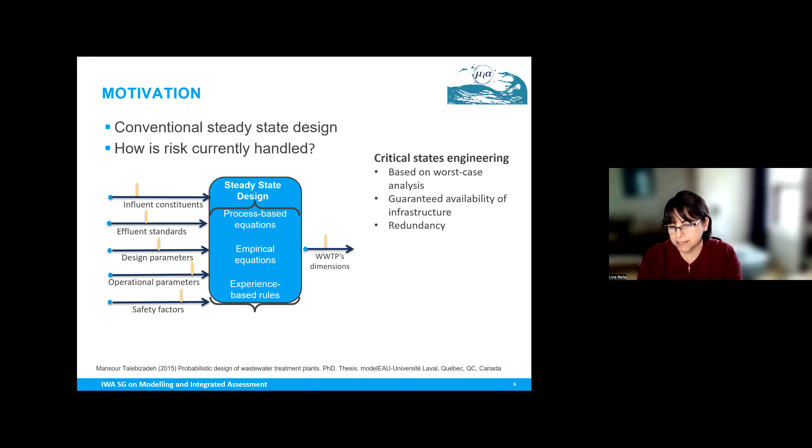In general, we find that we end up with 2 engineering approaches. One would be critical states engineering, essentially based on worst case analysis - for example, blowers designed on a maximum hourly airflow demand, potentially combined with a safety factor. The second engineering approach can be described as best effort engineering, based on analysis of average conditions - for example, the size of an aeration tank sized on a daily average load.

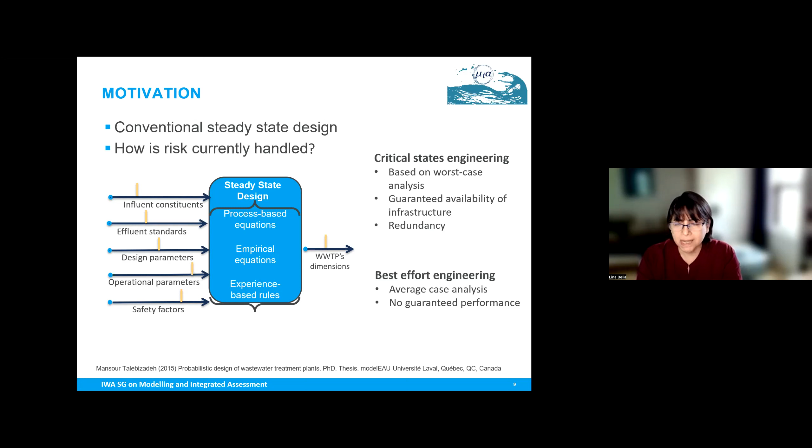Now, there are several drawbacks associated with this established procedure. It mainly implies that we work in a well-defined and stationary environment, so it kind of ignores plant dynamics. If you notice in the slide, a single input gives you a single output. It may also result in inflexible or inefficient designs, because it lumps risk into very few parameters, and assumes a combination of worst case conditions that may never happen. It also does not provide us, in a quantifiable way, the likelihood that a design will actually meet an effluent permit, and it does not address newly developed processes.

So over the last decades, we are transitioning to using process modeling and data-driven methods in our design.

And in operations also, I think we use more and more models for optimization, design of control. However, when we incorporate these models in our design procedures, which can actually overcome some of the downsides I mentioned earlier, in contrast to design guidelines, where uncertainty is accounted through the use of safety factors, in our models, we don't actually incorporate a formal risk evaluation procedure.

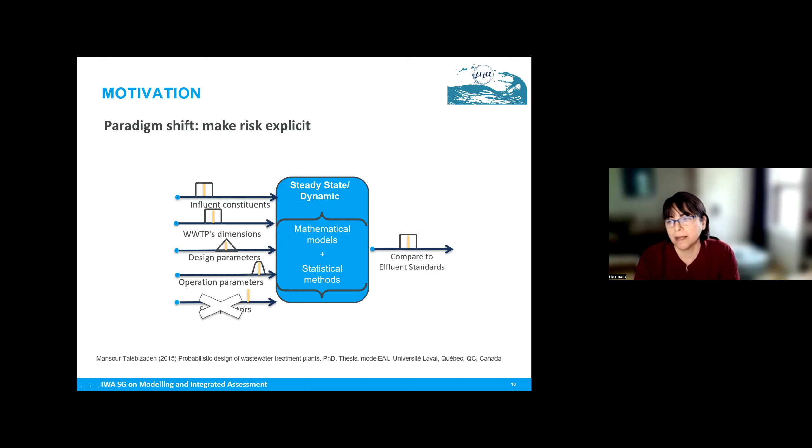The last section looks at risk and uncertainty in engineering projects in a broader view, and it also includes a chapter on the future directions of uncertainty analysis in our field. So in the next few slides, I will just give you a flavor of what is included in sections 3 and 4.

So one of the major challenges in transitioning from the guideline/safety factor design approach to a more probabilistic based and model based design approach that we identified was that traditionally risk allocation often focuses on very few design or model parameters, and it tended to be done in a very ad hoc manner. So in order to create a more structured framework for uncertainty analysis, we compiled and categorized the most important sources of uncertainty that impact a wastewater project. And we developed an uncertainty matrix.

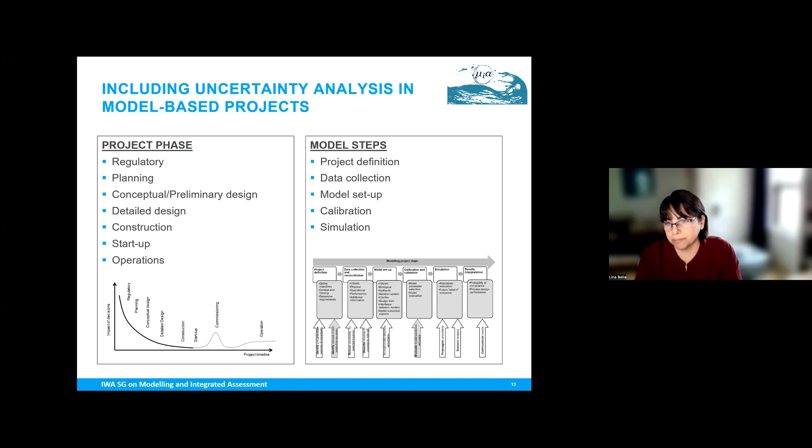Another topic that we highlight in the STR is discussing which uncertainty-related tasks need to be considered at each stage of a wastewater treatment modeling project, if we want to include uncertainty and variability. Of course, we can use modeling in any engineering project phase. The right-hand side figure shows you the typical 6-step simulation-based project execution flow sheet. And we also have the uncertainty-related tasks marked, identifying, for example, that the project definition stage is where we suggest that we select and prioritize some of the sources of uncertainty to be evaluated.

They start from defining the project objectives, propagating uncertainty, and the end result being the generation of metrics that quantify the risk of a specific design. So the goal is to provide the design engineers with an example of a method that quantifies the probability, for example, of compliance of a design.

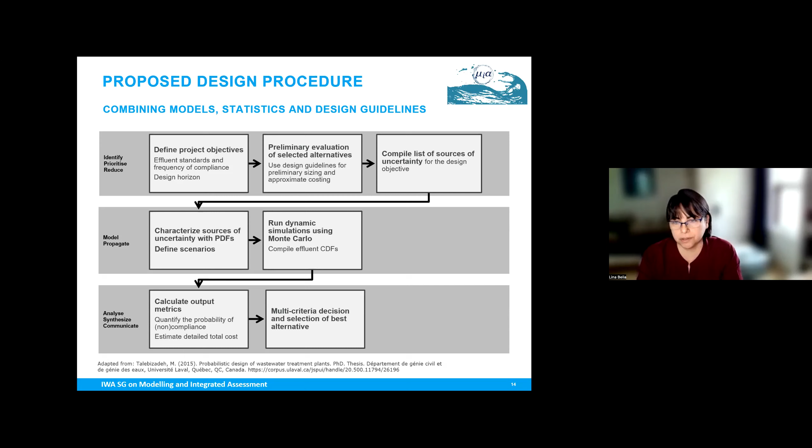Lorenzo, Bruce, and Peter will actually discuss some of the key elements of the procedure and its application in case studies. And finally, we also wanted to provide a wider perspective on what introduces risk to engineering projects and impacts decisions, such as the selection of a process or the size of a unit.

So in the STR, we identified two key areas: the stakeholders, because when we plan, design, or operate treatment plants, various stakeholders need to take decisions at different points under uncertainty. And this varies, of course, depending on the stakeholder. And our second big category was the project delivery method used. So that's the contractual environment that we work in.

So in infrastructure procurement, the contract delivery mechanism determines how risk is allocated among stakeholders. So depending on the way the infrastructure procurement contract is set up, risk will be allocated differently to the owner, the engineer, or the contractor.

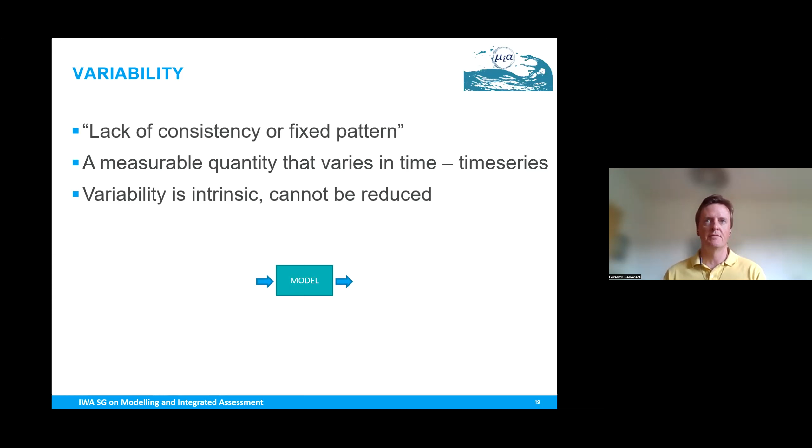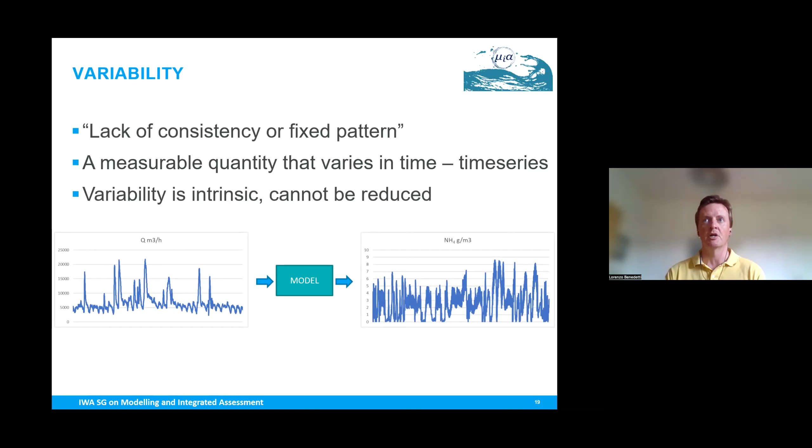So if you have a model and you feed it always with the same time series of influent flow, you will always get the same effluent time series for ammonium, with everything else staying the same, of course. Now about risk and uncertainty. Risk is defined as the expectation of losses associated with a harmful event. For example, the risk of failure of exceeding the effluent permit. Risk is calculated as the probability of failure times the cost of failure.

Probability answers the question whether it is likely or unlikely that the event will happen. So for example, what is the probability of a design to meet the effluent standards? Probability is the expected likelihood of occurrence of an event. So in the end, uncertainty assessment and propagation are the quantification of probabilities. This means that quantifying risk means assessing uncertainty, which means quantifying probability.

There are different levels of uncertainty, going from complete determinism to full indeterminacy, going through statistical uncertainty, scenario uncertainty, qualitative uncertainty, recognized ignorance, and total ignorance. We're going to have a look only at the two quantitative types of uncertainty.

First, scenario uncertainty, which deals with questions like, what is going to happen at my plant in the next 30 years? What about new industries in my catchment? What about new treatment technologies available, new legal requirements to fulfill? So to these types of scenarios, I can maybe put numbers that I can run with my model, with separate scenarios, but I cannot really give statistical properties to those.

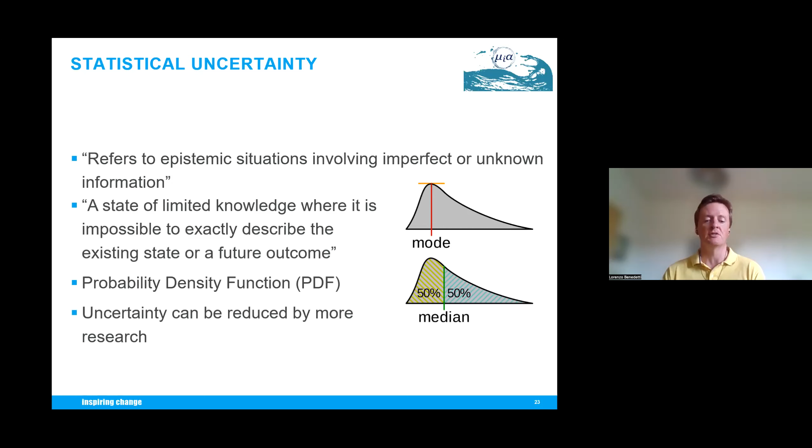So how do we propagate uncertainty through our models? We do that with so-called Monte Carlo simulation, which is sampling many times the input parameter distributions. We start in the probabilistic domain with the distributions of the inputs. So we run Monte Carlo simulation, which is, as I've shown, many samples. Every sample is called a shot, which is a value for each of the input parameters. And these values are put into my deterministic model, which is run and produces discrete results.

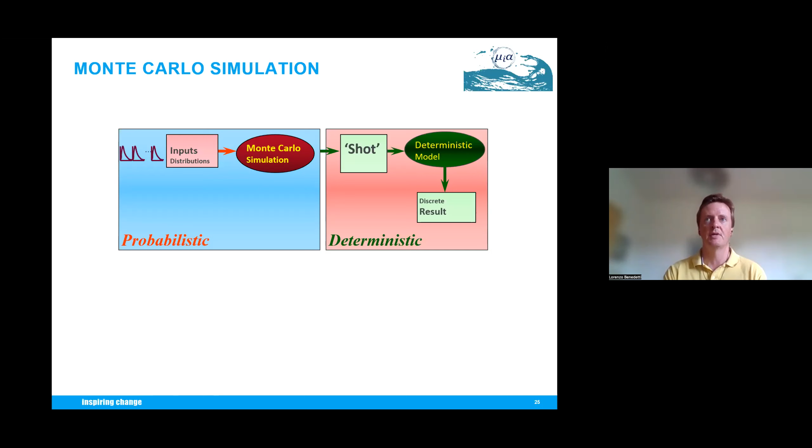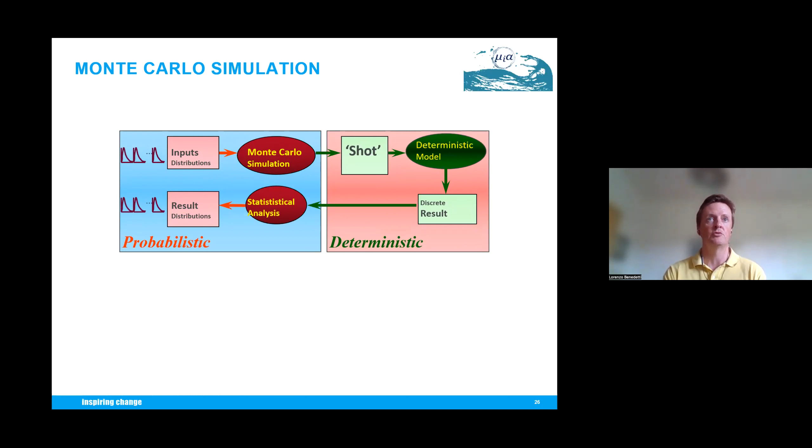This is done many times, as I've said already. We have many time series, many results. These are summarized in the probabilistic domain by means of a statistical analysis, which will produce distributions of the results, probability distributions. And we can summarize those by means of, for example, an average or a 90th percentile.

This is an example of the type of results we can get. This is a few days of ammonium effluent of a plant. And if we look at the blue line, this represents the temporal variability due to the influent variability; it is the result of a single simulation. In red, we have the output uncertainty band due to the parameter uncertainty. So this is the result of the Monte Carlo simulation, and specifically here, the 95th and the 5th percentiles. And this means that I'm 90% confident that the true result will be within this band.

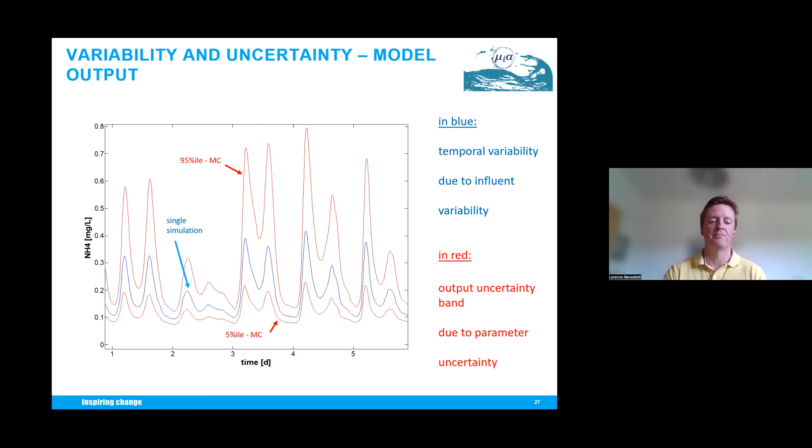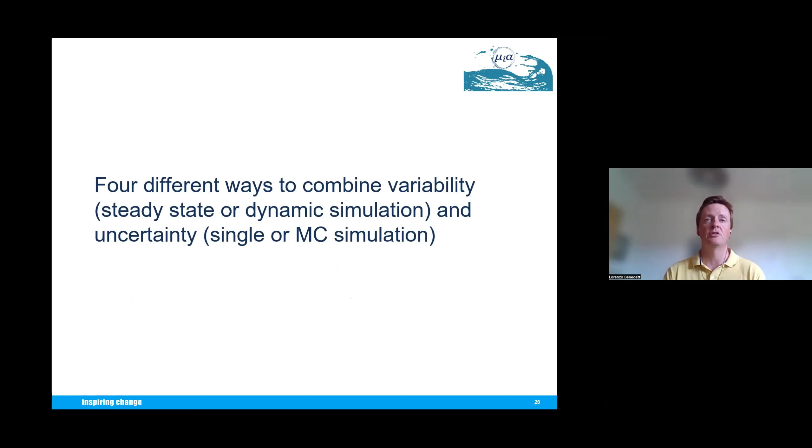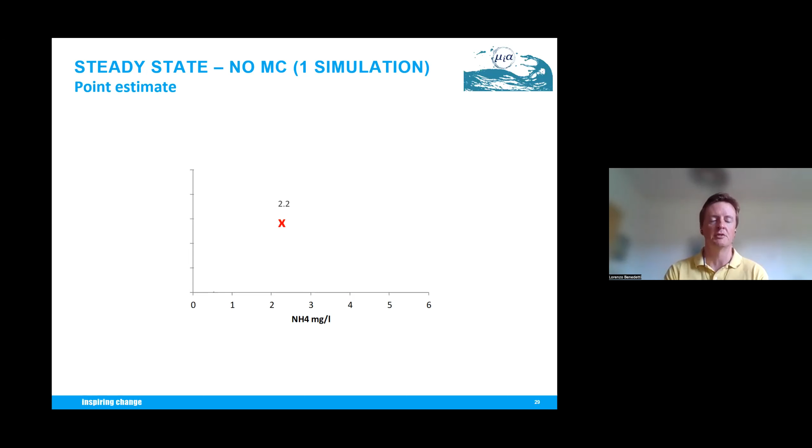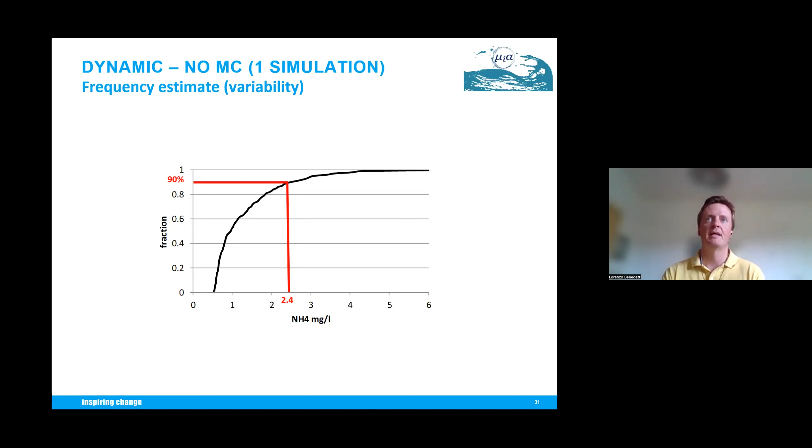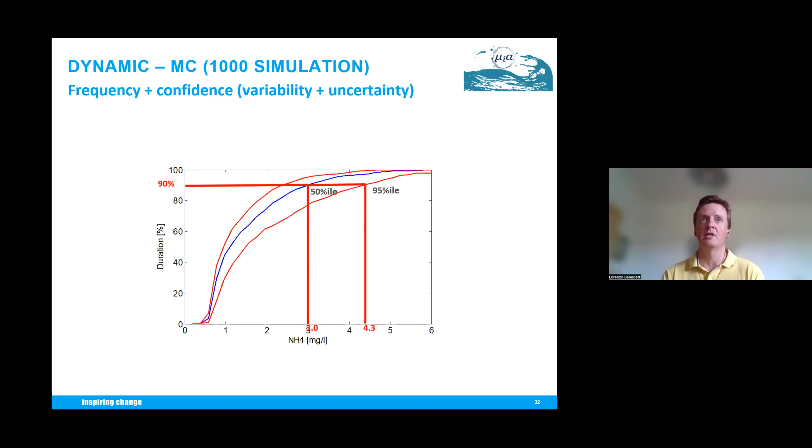If we go back to a single simulation, but dynamic, and if we plot the effluent time series as a cumulative curve, we can calculate the frequency estimate. So we can say something like ammonium will be 90% of the time below 2.4 milligrams per liter. If we combine the two, so dynamic simulations summarized by cumulative curves and Monte Carlo simulations, I have the frequency and the confidence, so variability and uncertainty. And I can say, for example, that I'm 50% sure that I'm 90% of the time below 3. Or again, that I'm 95% sure that I'm 90% of the time below 4.3.

So in summary, variability is something, let's say, sure, that we push through the model and we get the frequency of compliance. On the other hand, uncertainty is about possible futures. So confidence means in how many possible futures something is happening.

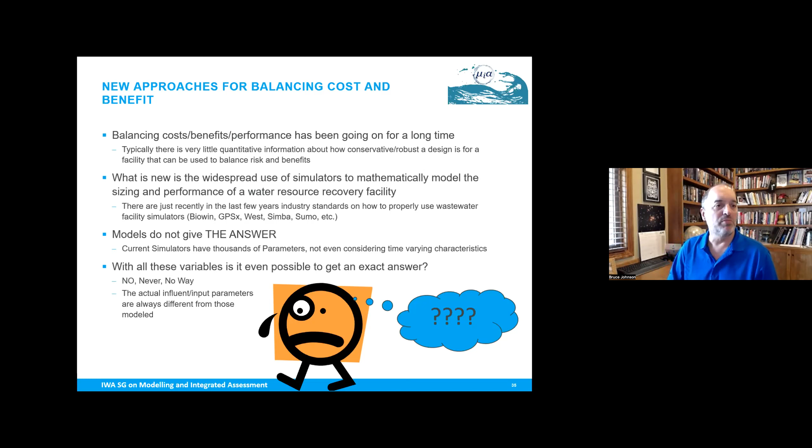So as Lorenzo pointed out, we can quantitatively evaluate the statistics of things happening at the plant. This requires daylighting the risks that we've buried within those risk factors in our designs, and it allows us to manage that risk rather than doing the more typical risk avoidance approach, which can have some fairly significant cost implications.

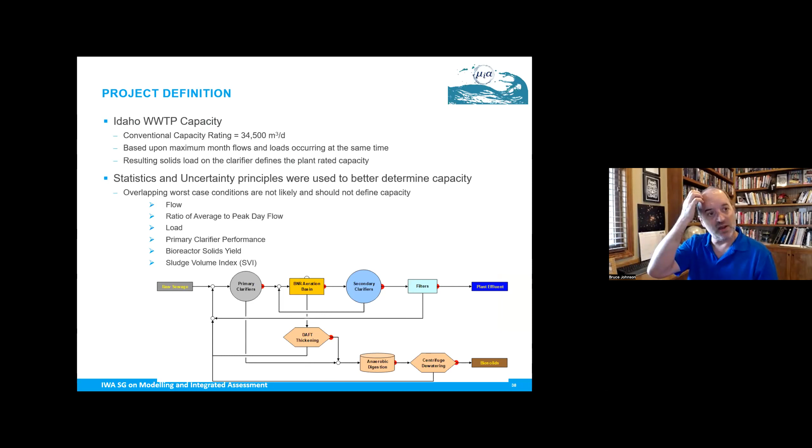So some examples of doing this: first, at Meridian, Idaho in the US, where we did a statistical re-rating of the facility. This is a medium-sized plant, about 35,000 cubic meters per day, and the capacity in North America was based on a standard approach of maximum 30-day loads and flows happening at the same time.

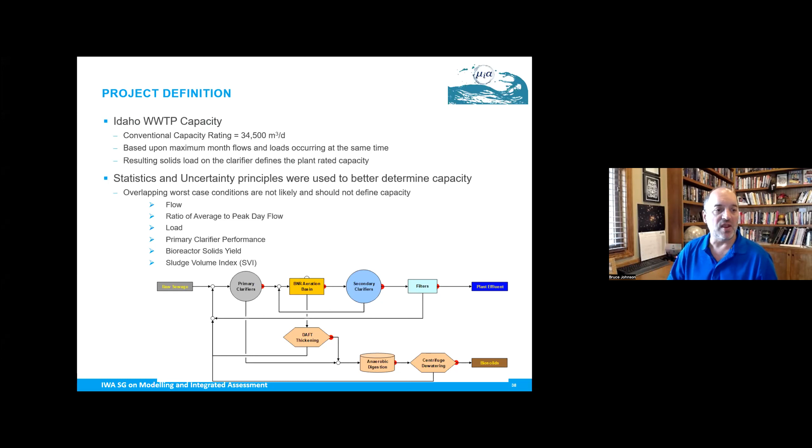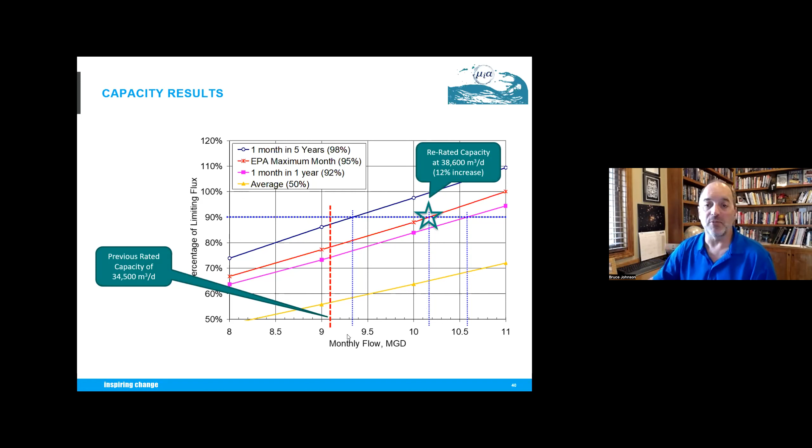But in the US, the EPA maximum month is about the 95th percentile, the red line. In this case, the red line intersects with the 90th percentile confidence of achieving it at about 38,600 cubic meters per day. So this gave about a 12% re-rating increase at the plant, essentially for free for this utility by using this approach, and it was accepted by the local regulatory agency.

Another example is the Blue Plains plant, the large facility in Washington, D.C., in the US. The design flow of this plant is 1.4 million cubic meters per day, and we were looking at what the capacity would be to achieve a TN of less than 4 milligrams per liter out of this new facility we were putting at the end.

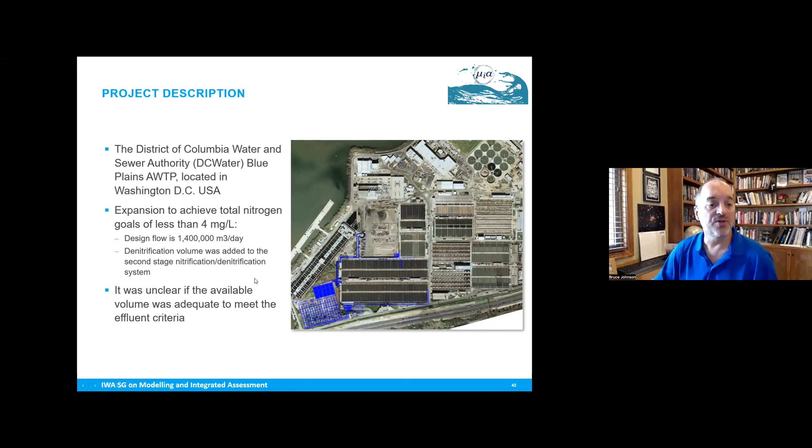It was unclear, because we were using all the volume we could there in a very limited site, whether we were able to achieve that within the available area. So similar to Meridian, we did a whole bunch of new simulations, about 3,000, and combined those together into typical months, then seasons, then into a year, because there's a yearly permit there. We actually looked at TIN as our criteria for this.

We had a number of inputs, some conventional ones—temperature, flows and loads—but I'll point out we also put in some, I'll call them, more operational uncertainties: is a nitrification tank out of service, is a denite tank out of service, is the methanol being delivered on time at the plant? We could quantify this on an uncertainty basis to develop the likelihood of the plant achieving its goals.

So what we found when we ran through this uncertainty analysis is that we got very good compliance. Almost all the values were less than our target of 1 TIN, which we thought we needed to hit the 4 TN. But we did have a bimodal distribution here, where we got some higher numbers at the end.

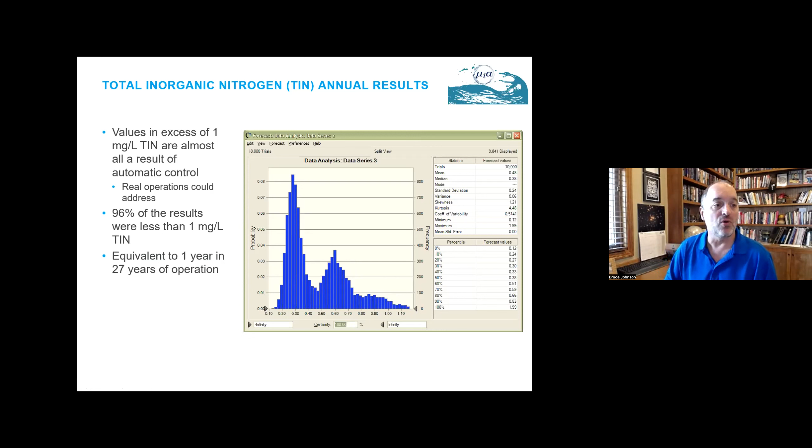All of these results were really a result of automatic control and not having operator intervention, which could affect this. We determined from this that there was an equivalent of about 1 year in 27 years of operations that it might exceed, even with no operator intervention. So it gave DC Water great confidence that this facility was able to meet their goals for their plant.

Now the last one was a Durham plant in Tigard, Oregon, in the US. Adrian Minetti, who's now with Clean Water Services, did this work. In this case, the plant was looking at needing to achieve nitrification in the wintertime, which they had not needed to do before. They wanted to know how they needed to run their plant to achieve this goal during the winter. They have a very complex permit, and their effluent ammonia in the winter would be a function of both the river flows and the temperatures.

So what we did is we used the EPA's nitrification safety factor in a very simple spreadsheet to look at the impacts of sludge age, river flow, influent temperature, historical patterns, the nitrifier maximum specific growth rate, decay rates, oxygen, and the various probability functions of those.

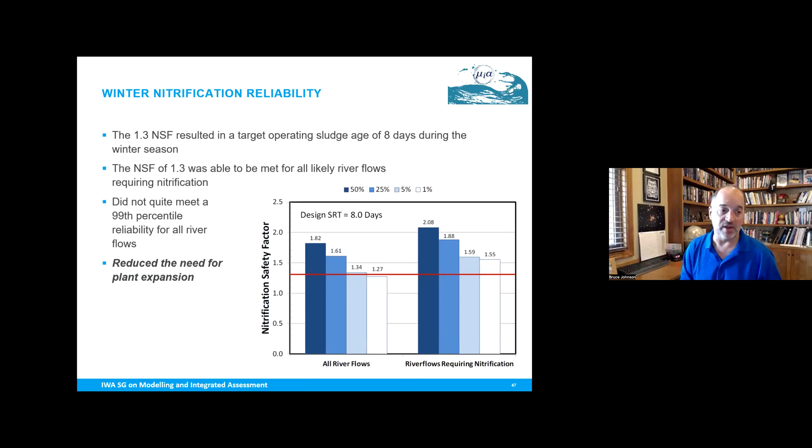What we found was that if they targeted a 1.3 nitrification safety factor, or about an 8-day sludge age during the season, that covered them to achieve their nitrification goals for almost all conditions over the winter. It didn't quite meet the 99th percentile reliability, but it felt like this was a good point to hit. What this meant for them is it greatly reduced the need to expand the plant, allowing them to extend the timing of an expansion and reduce the amount of expansion needed, which had significant cost savings for the plant.

Just to show you, this approach has been used at a bunch of other facilities all around North America to help various utilities identify either what their risks are or what opportunities exist to achieve cost savings by using uncertainty analysis.

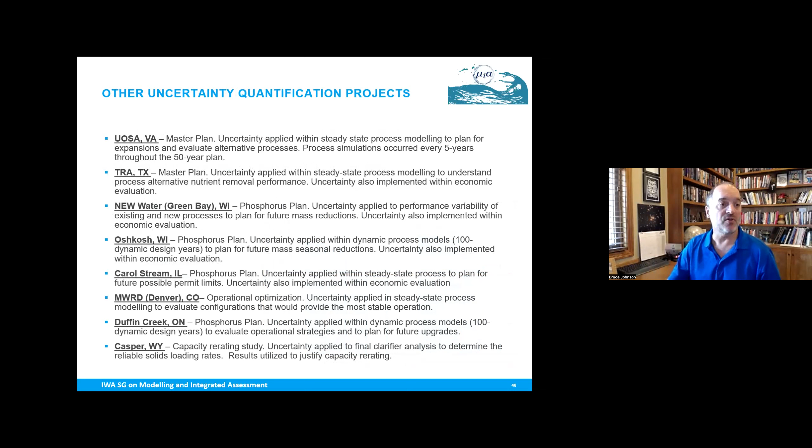So the use of uncertainty analysis in wastewater treatment has been shown in these case studies and others to provide both quantitative risk data and the associated cost savings with it. Utilities can now participate in that risk assessment for their facility and not just rely on whatever the engineer or designer has to say about the risks there. It allows for more informed decisions in the design, construction, and operation of any facility.

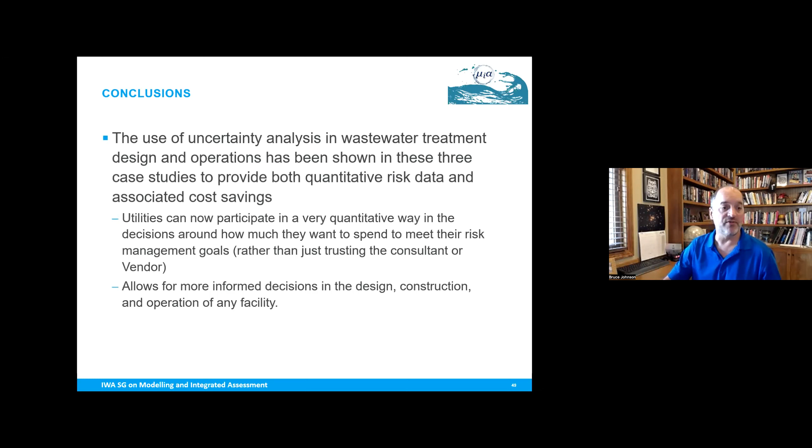It can be as simple as applying Monte Carlo analysis to basic design equations, as we did with Clean Water Services, or we can do whole plant simulator runs, as we did in the other two facilities. This use of uncertainty analysis is really a logical step to provide data to make more informed decisions in our designs and approaches.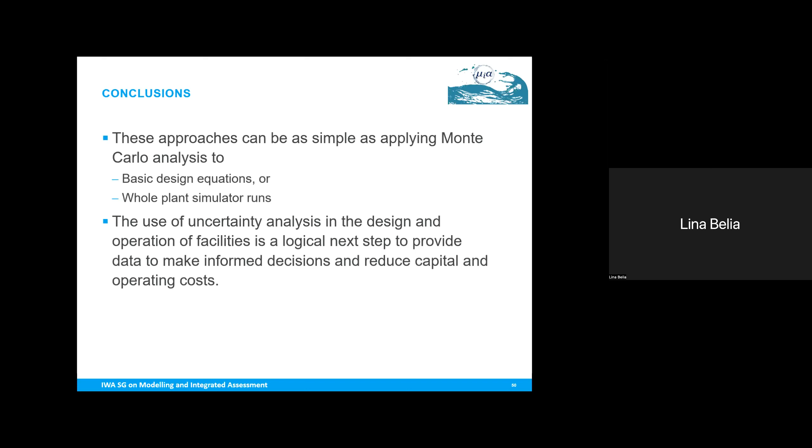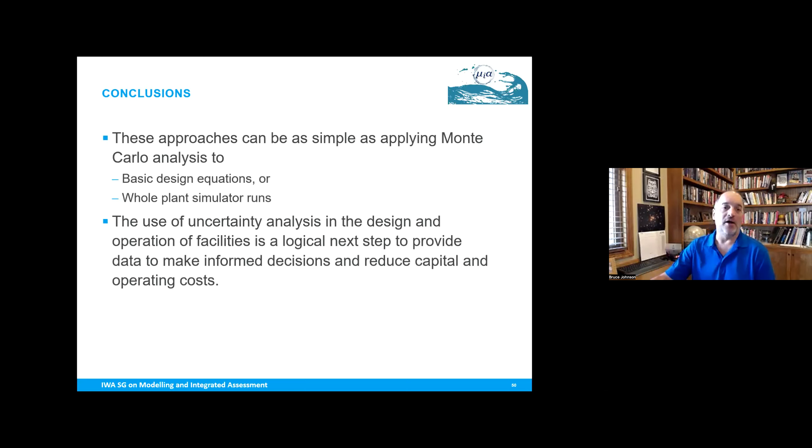That is, I think the formal term is expert opinion in there, and it's basically people knowing what there are. Two ways: you can do a sensitivity analysis, where a lot of these Monte Carlo tools will help tell you what the most sensitive parameters are into your results. Or you can use your expert opinion. If people know modeling well, many of us on this call know what those most sensitive parameters normally are, and so those are the ones we use, like on DC Water. We used a number of different ones that we knew were highly variable, and then we talked with the operations staff about what the operational uncertainties were at the plant to come up with these. So there is a lot of expert opinion involved in that, but there are also quantitative ways through sensitivity analysis to do model-based type parameter determinations.

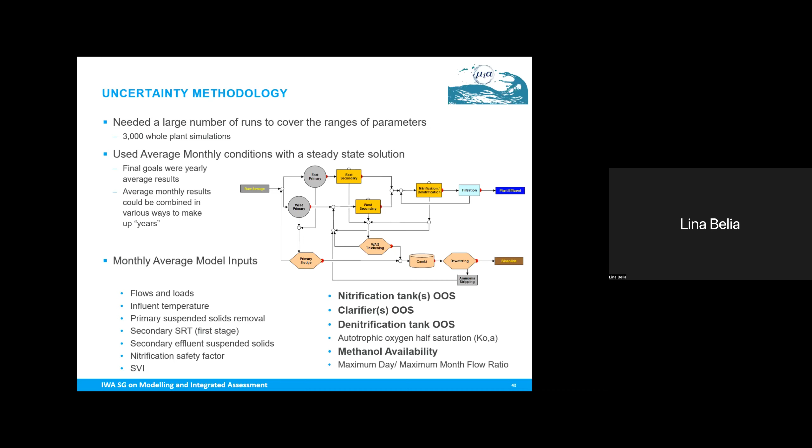Thank you, Bruce. So I think maybe one more question for you. When you were looking at the evaluation for nitrification in one of your case studies, what did you use as inputs for the model? Did you vary the tank volumes for different simulations? Maybe you can discuss a little bit how you did this evaluation for the nitrification capacity.

Yes, so in this case we kept the existing system that they had, and we wanted to find what the existing system needed to run at to work okay in the plant. Based on that, we didn't vary tank temperature or tank volumes or anything like that. So we did a historical analysis and fit probability distribution functions to flows and influent temperatures, and then also correlated them together, because those two are actually correlated, where as river flow goes up, influent temperature tends to go down at the plant.

And then we put in expert opinion on the possible different nitrifier growth rates, decays, and KOAs in there. We were able to combine that into a single Monte Carlo simulation with that simple spreadsheet of the nitrification safety factor calculation, and then compared that result against the actual performance of the plant. In this graph here, you can see that at 1.3, anything above that value got pretty reliable nitrification out of the plant with the river. So that is how we did that.

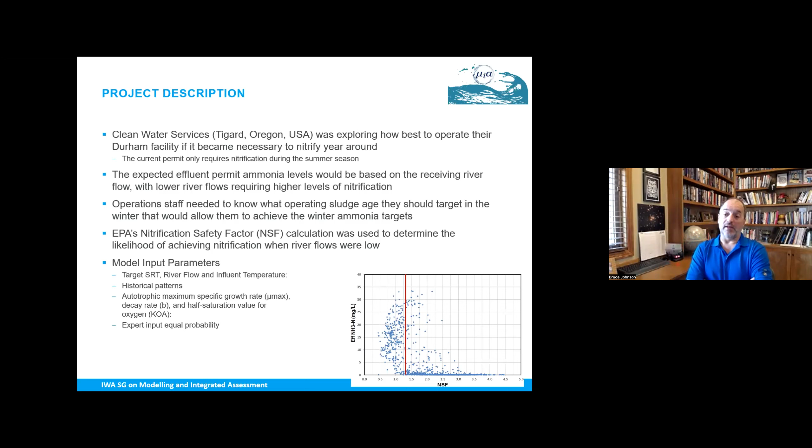Thank you, Bruce. I think we're going to stop the questions here. There's a couple more addressed to you, Bruce. Maybe before you leave, you might have the chance to open the Q&A box and type in your answers. If you don't have the chance, then we will make sure they are answered later on.

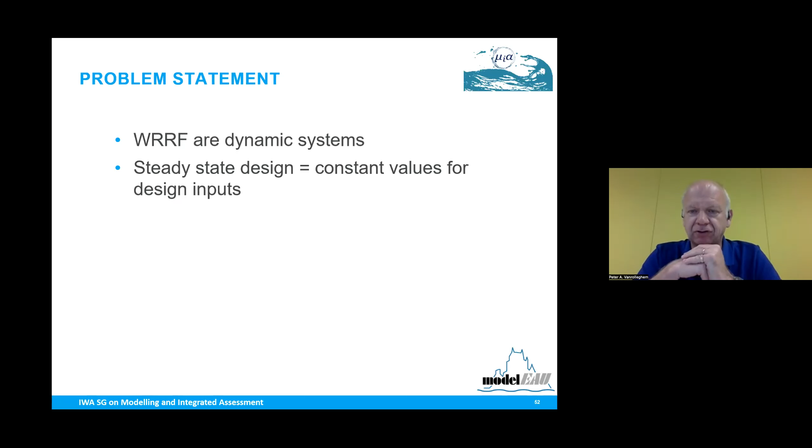So we know that WRRFs are dynamic systems. And if you look at steady state design, then we use constant values for design inputs. So even though reality is dynamic, in steady state, we may take an average value, or some peak value, or some percentile value as information, run that through design guidelines that use steady state equations.

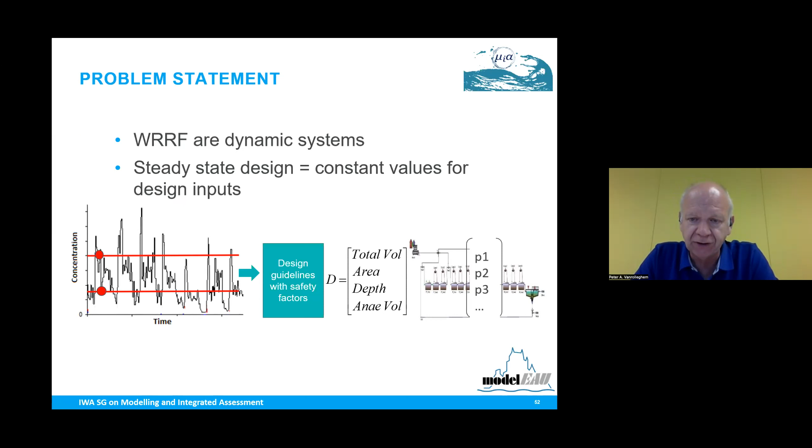And then we may check with dynamic simulation how this will all work under special situations, overload situations, wet weather events, what have you, using the parameters that came from this steady state design. You've seen this graph as well. So you take a number of elements of steady state design, run it through process-based equations, some empirical equations, some experience-based rules, and you come up with the treatment plant's dimensions.

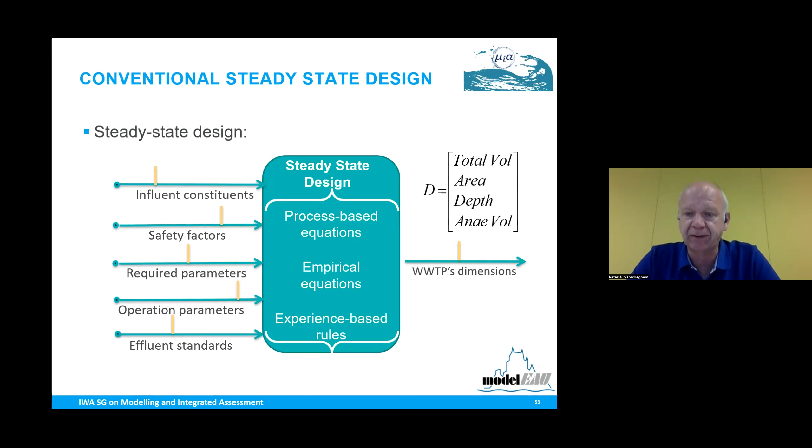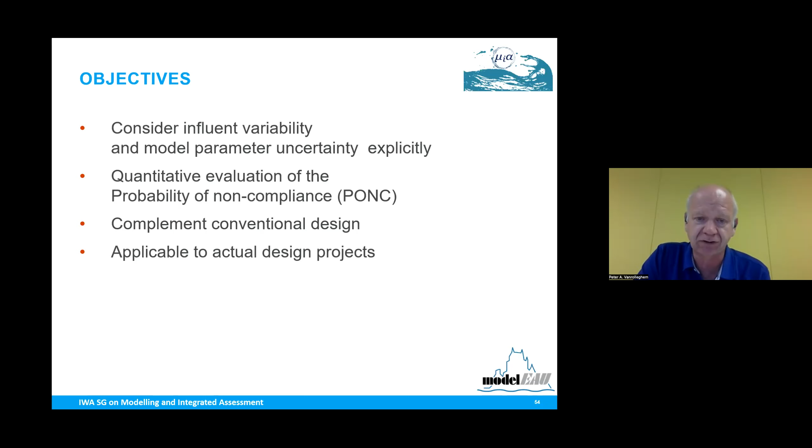So the objectives of the work that was already happening, but that we wanted to formalize, was that we wanted to explicitly consider influent variability and model parameter uncertainty. We used the term probability of non-compliance to express the uncertainty that might come with the design objectives we try to reach. We don't see this as a replacement of the conventional design approach, more as a complement, and it should be applicable to actual design projects.

So we try to add something to what is currently happening. Basically, my presentation is about this proposed design methodology. It consists of 3 main steps. You do a pre-design using classic methods, steady state pre-design with different levels of safety. You analyze those pre-designs and do a preliminary evaluation of how they look, how they work, how they perform. And then you go into the detailed dynamic simulations to assess the probability of non-compliance.

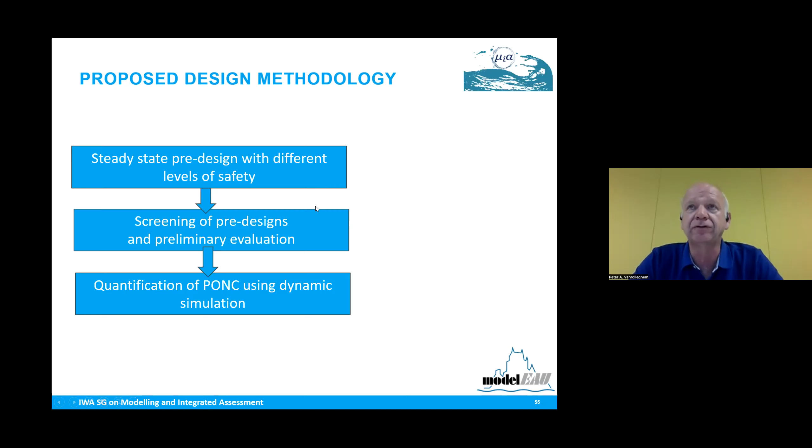So the reason why we do the screening, these 2 first steps, is basically to reduce the number of things you have to evaluate with compute-intensive dynamic simulations. So you will create inputs that are the range of values you expect, uncertainty bounds, and out will come a curve that you've seen already, performance of the design in terms of probability of non-compliance, given a certain effluent standard.

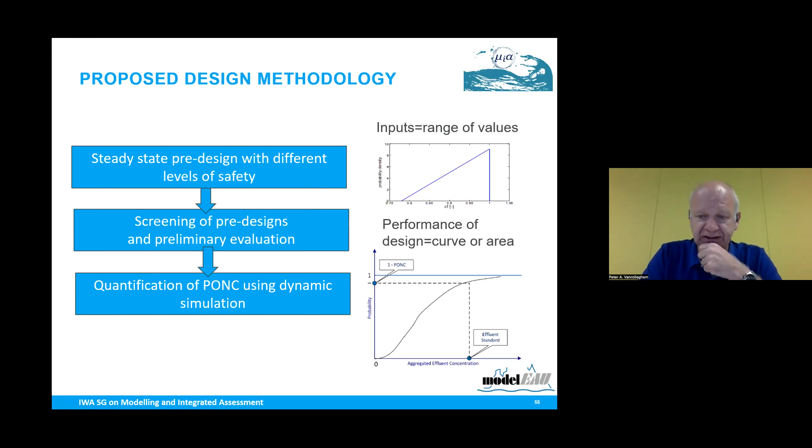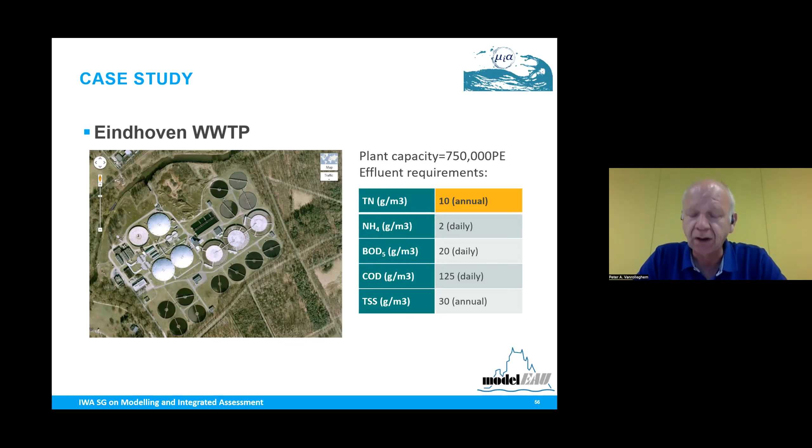Ammonia is 2 on a daily basis. BOD5 is 20 on a daily basis. COD is 125 on a daily basis, and suspended solids is 30. We will focus on the nitrogen part in this application.

I'll first go through the first 2 steps. This is really a short presentation. There are extensive presentations about this methodology if you would like to hear about this, and then we'll go to the PONC quantification.

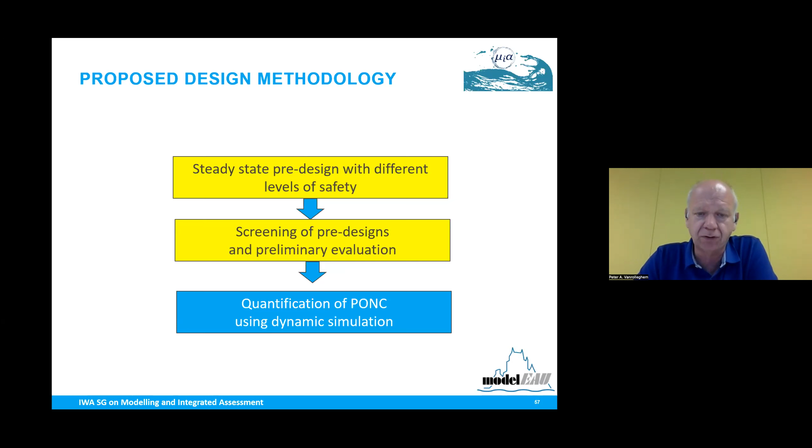So rather than doing this, we're going to do this. We're going to evaluate a number of possibilities, potential designs, by looking at the uncertainty around influent constituents, by looking at different safety factors, by looking at some of the parameters that we use in our design models, operational parameters. Of course, the effluent standard, we don't play with that.

And then outcomes, of course, not one design, but multiple designs. And we look here at the 4 variables that we looked at in this example: total volume, anaerobic volume for the phosphorus removal, the depth of the final settling tank, and the area of the final settling tank.

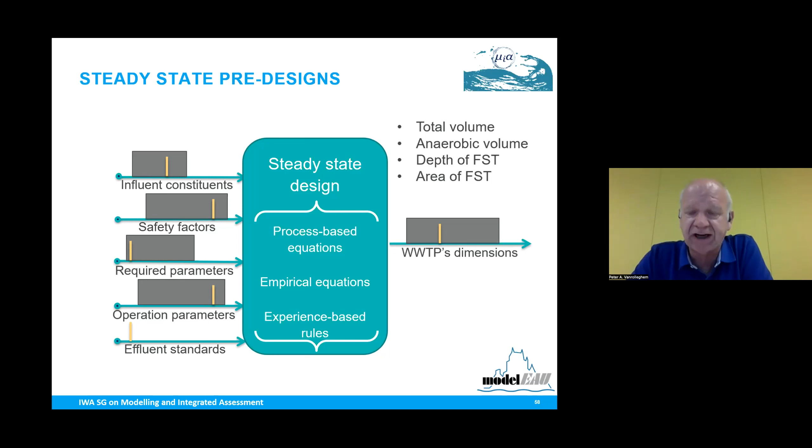What comes out of this are hundreds of design values. So I run and run and run Monte Carlo runs with randomly selected points in these gray boxes, and out come these gray boxes on the right, which give us all these dimensions. And it becomes a cloud because we have 4 dimensions here, the 4 design variables we have.

And what you see, the red dots are basically selected ones that we select because we want to cover the gray dot space. And basically, these are the ones that we're going to analyze in detail.

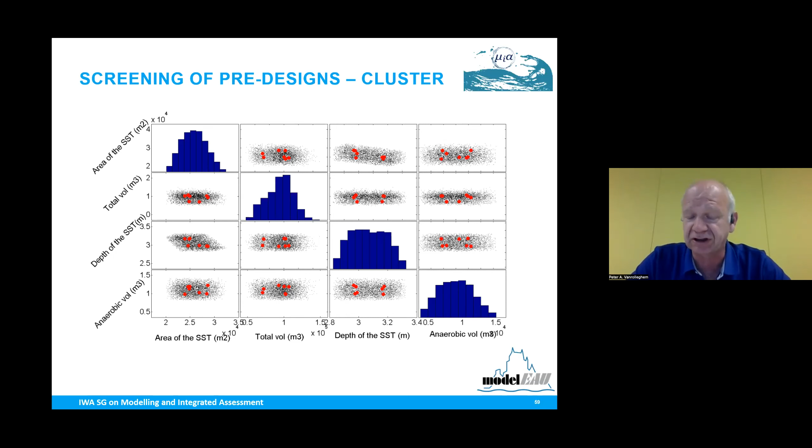So you see on the diagonal, you see the distribution of these 4 outputs of the design, so volumes, areas, depth of subsystems. And you see that some of these are correlated, although the correlation is really small, so the design variables are not very dependent on each other.

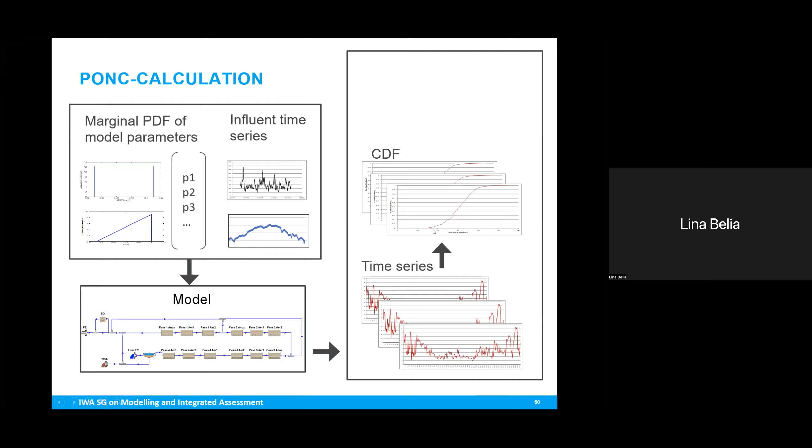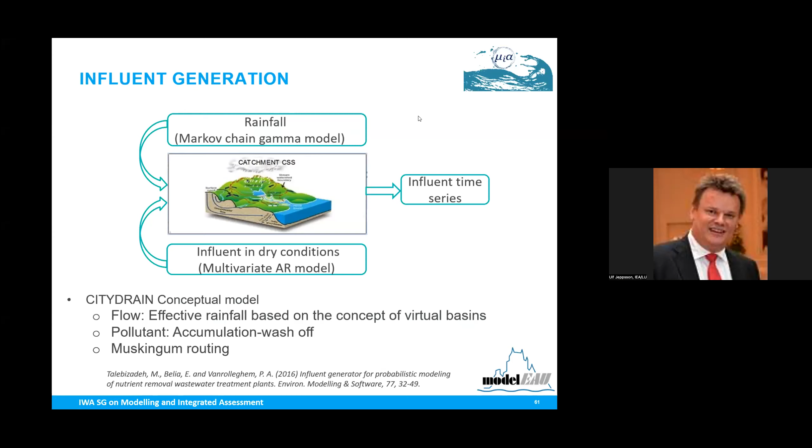So I lost my connection apparently. Hello. Yes, we can hear you, you're back online, Peter. Okay, start sharing again, sorry for that. It happens here at EAWAG sometimes that we have a glitch in the connection. Sorry for that, I hope I didn't... I'll just go back to the influent generator. I think I got there, correct? Go back one more slide. Yeah, okay, Peter, you have to go from the CDF to PDF, then to the notes. Okay, thank you, I don't know when I stopped.

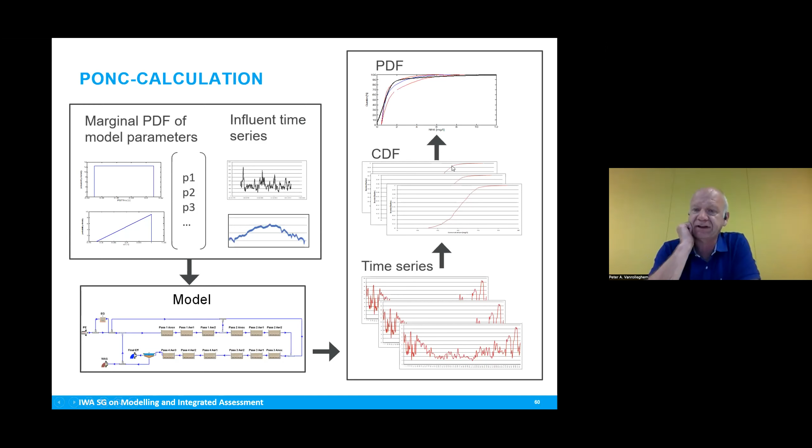So what we have done is we have time series for each of these runs, which will be different, of course. The ammonia will be higher or lower depending on the parameters you have, or the influent loading, or the temperature profile you put in. Each of these will be transformed into its concentration distribution function, so it will be shifted left or right, or have a higher or lower slope. Then we calculate from these curves the probability of non-compliance. So it's 90% sure that we will not be able to reach the 2 milligram per liter limit in the example we have.

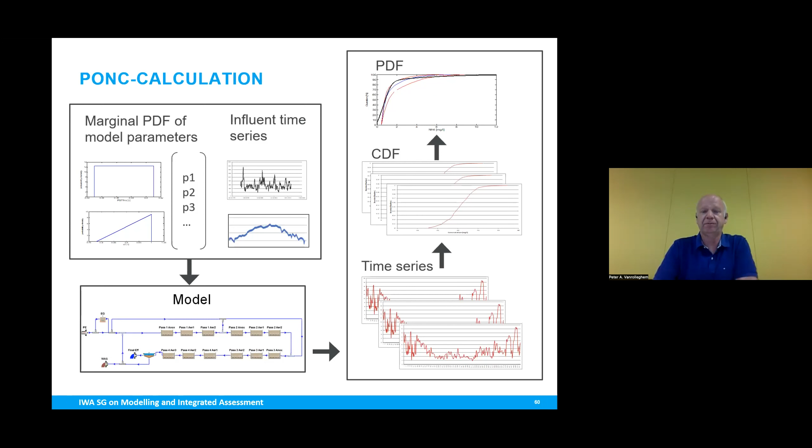One of the important parts of running dynamic simulations compared to steady state simulations is to find a reasonable, realistic time series, and multiple time series. We want to run this not for one year, but every year will be different in the future of this plant, so we want to make sure we covered it enough. So what we spent quite some time on in the project was to create an influent generator, and there are multiple ones in the field. What we wanted to make sure is that it's quite realistic and that it can cover meteorological information, because we have combined sewers in many cases, and it should also cover uncertainty and properties of the generation of pollution in the city or in the runoff.

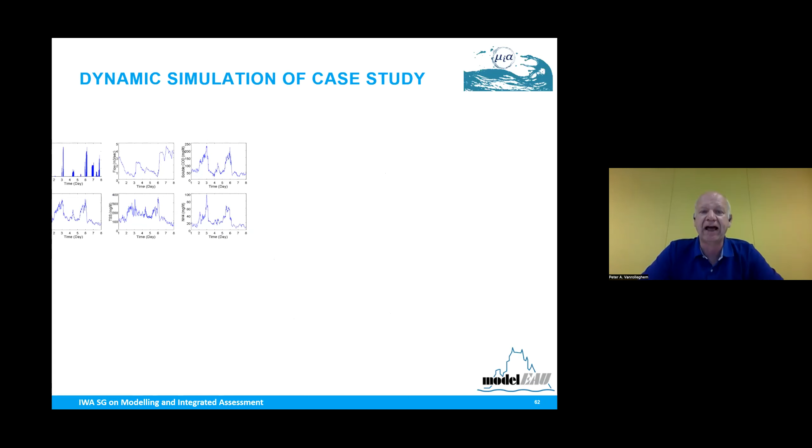We use for this CityDrain, which is an existing model that comes from the sewer system modelers, where it allowed us to propagate nicely rainfall, also doing runoff accumulation and wash-off in the catchment. Then we have, of course, a dry weather part, and we have the Muskingum routing that allows you to do hydrological propagation. And we have made a rainfall generator, based on Markov chains, that will generate, on the basis of historical data, new time series of rain. This gives us a tool that allows us to prepare influent time series for hundreds of years, let's say, all different.

Once you have this influent profile, you can basically put it through the wastewater treatment facility model we have, and you will play around then with properties in this process, properties of settling, growth, etc. And the designs will be placed on, in our case, the four elements that we look at.

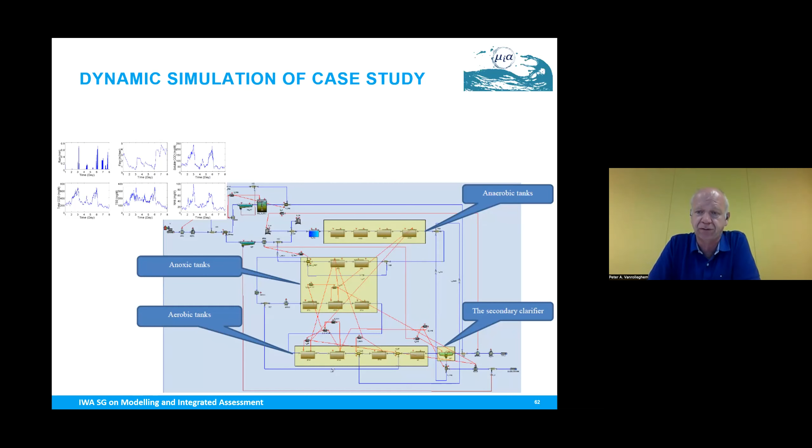I'll just give you now a few results to illustrate what comes out, and I will present it in multiple ways. So we have here 5 alternatives, alternative 1, 2, 3, 4, and 5. And for each of them, we have this calculation of the ammonia concentration, cumulative distribution. And you see that there's 3 lines on this.

The worst case is basically the concentration cumulative distribution that we get for the time series of 1 year with the worst case parameters. Worst case parameters would mean the lowest levels of nitrification capacity for this one. The nominal one is what we call defaults, that you all know from the models that we typically use, and mixed is a kind of average of all the Monte Carlo simulations we've done. And in this case, they're pretty close to each other.

What you get out of this, for alternative 3, for instance, is that in the worst case, the red line here, the limit is 2 milligrams. We can expect that 29 days in a whole year, you would be above the limit. Whereas if you look at the other parameters, we talk about 3 to 4 days. So it's much closer to the top here. There's a few days where you might go over the limit. And then the question is, do you accept this or not?

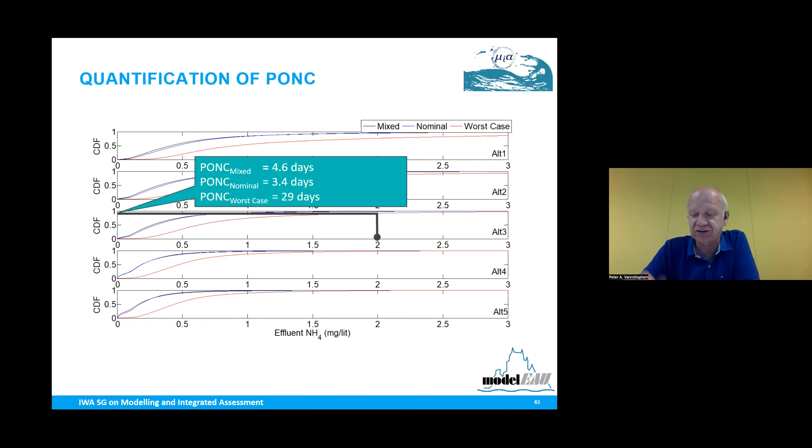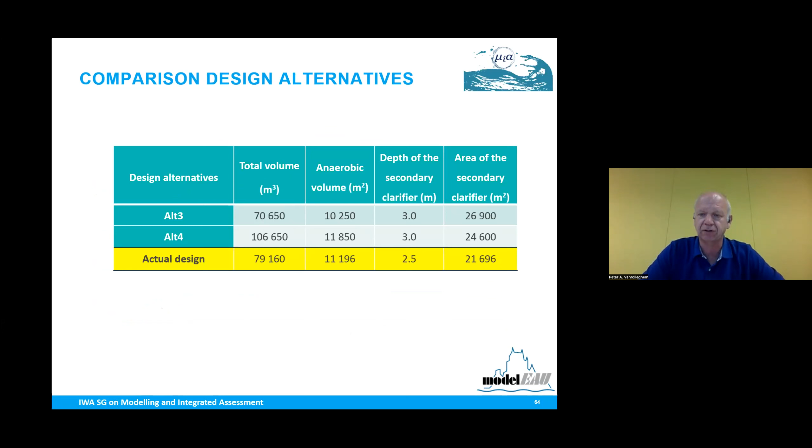That's the design question. Just looking at what the real plant is that was already built before this methodology was applied. The real design is in between alternative 3 and 4. So this is the design that exists in Eindhoven. These are the numbers that came out of the designs 3 and 4, and you see that it's pretty close to these. Let's look at some other ways of presenting this.

So in summary, the work that has been done by Mansour has allowed to develop a design method that is based on explicit characterization of variability and uncertainty. One of the contributions that was important to make this all work is to get an influent generator that can generate those variabilities and uncertainties and preserve the observed statistics in data. I think we have developed a rigorous calculation method of the probability of non-compliance, PONC, and we've applied this to an actual case study.

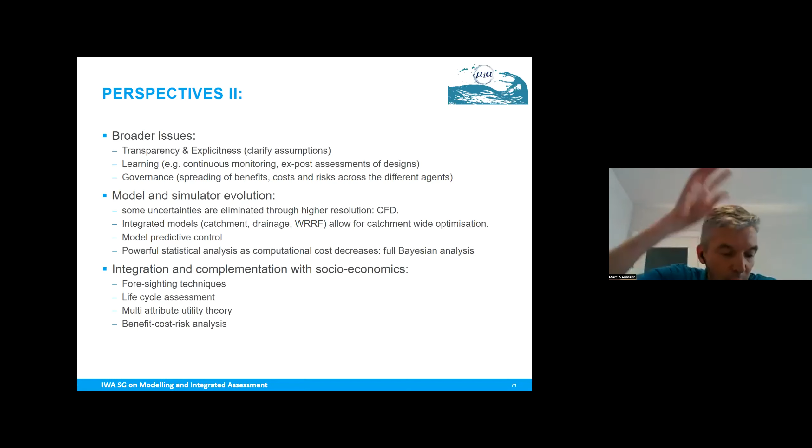Then in the integration more on the economics side, what we appreciated in this work is that in the curve that Lina showed at the beginning, where we had the degrees of freedom as a function of the project stage, a lot of the central uncertainties are right at the beginning, so at the regulation or at the planning, and that we're still lacking a more structured use of foresighting or structured scenario analysis type of techniques to address this.

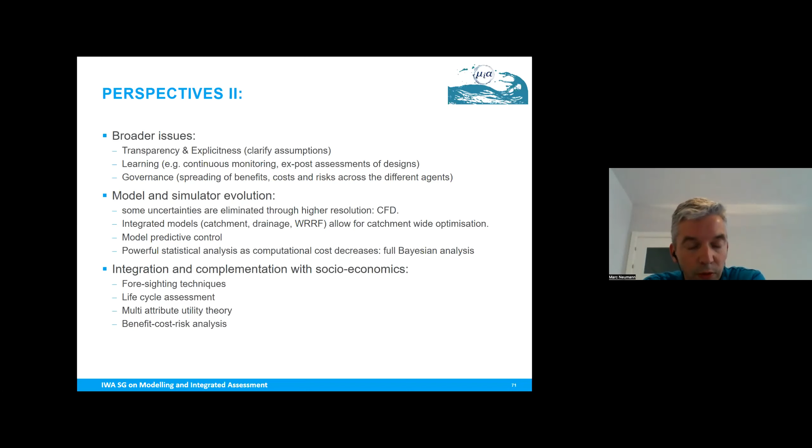And also our effluent requirements are becoming more complex. So we're typically not designing just to 2 or 3 concentration limits, but we are getting more and more objectives that we need to comply with from a life cycle perspective.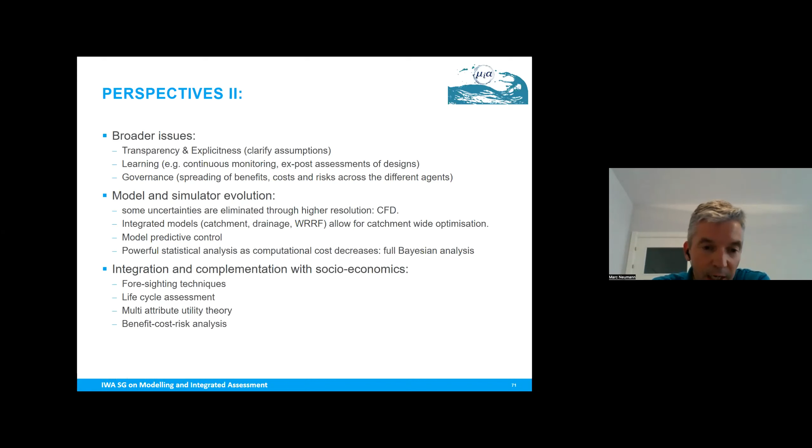And then these last 2 points touch again on this need of economic evaluation of the benefits, cost, and risk, where Bruce also showed us in one of his examples how that then also starts to become a motivating or even a necessary factor to start taking this explicit view of dealing with uncertainty.

But you can imagine here, just as one example, decentralization, which might substantially reduce uncertainties with regard to the planning phase. If in the extreme case you have a one treatment plant per building scenario, then the uncertainty about the future size of the city, which is connected to a single central treatment plant, becomes smaller. But maybe uncertainties regarding operations become larger.

So we have other options here also to address uncertainty, also moving into robustness and into uncertainties related to reliability in operations. And then maybe more holistically into resilience, into understanding how wastewater treatment plants are interconnected with other aspects of urban public services, or with the wider issues in a catchment or in a river basin.